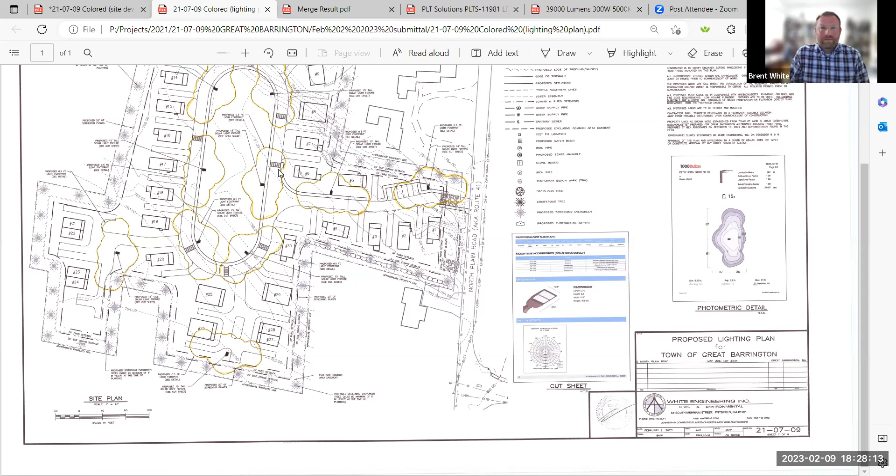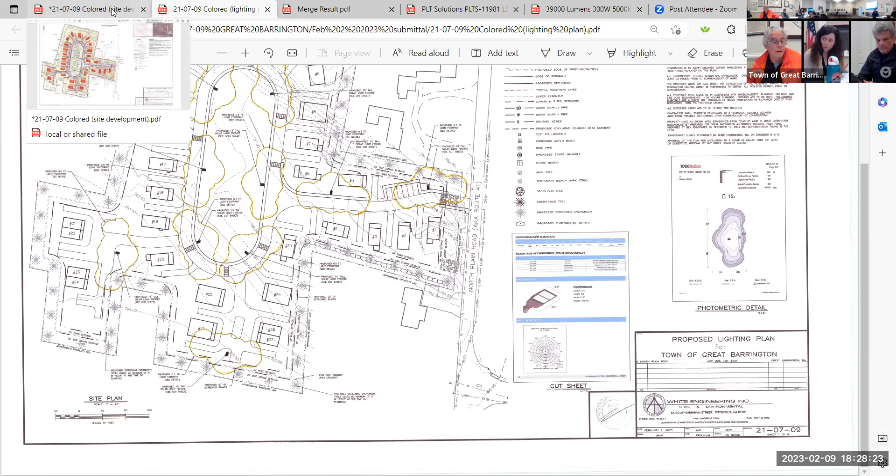Anything else, Jonathan? Not right now. Okay, we can come back, we'll just give everybody a shot though. Jonathan? First of all, I'm pleased that you went from 19 to 30. That's a start. What I don't think you've accomplished is a PURD.

Because this is basically a subdivision. And the thing about a PURD is it allows you to cluster the units and provide more open space. And what I'm seeing is probably 6.5 acres of lawn, and the rest is just whatever happens on the perimeter. So I don't think it qualifies as a PURD. Show me one cluster on here of housing. I don't see one cluster, which is the purpose, one of the stated purposes of a PURD.

Well, can I ask you just, in reading the language here, it says that the purpose of the planned unit residential development in 8.5.1 is to allow for greater variety, creativity, flexibility in development, provide harmonious and diverse housing choices with varied setback lines, dwelling types, and cluster-type site planning with provisions to control. I read that as allow, not require. How is this different than a subdivision? It looks very much like a subdivision.

Well, it's greater variety and density. It's got some 2-family units. We allow 2-family by right, we allow single family by right. I don't know if they could get this many units in a conventional subdivision, but realistically, given the infrastructure requirements... they could, I don't know, Jonathan. But that's not what they're proposing.

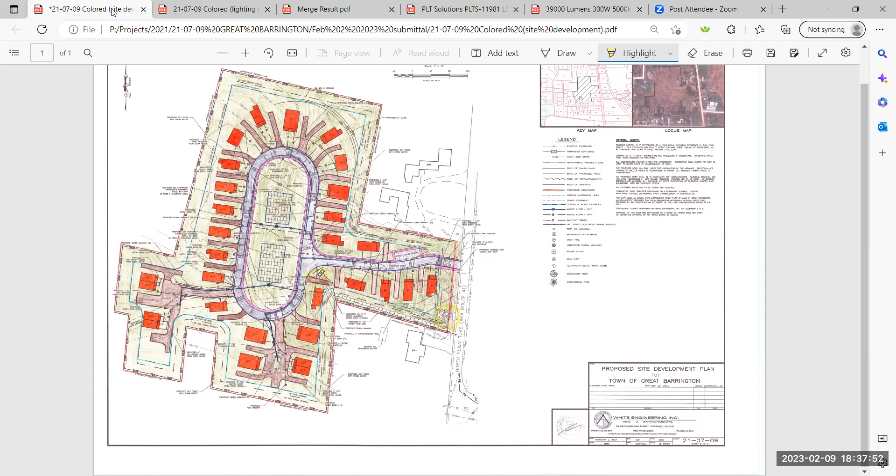The meetings we've had have expressed the desire for parking right next to a driveway, right next to their home, for bringing in groceries and that type of thing, and having a little yard, a little green space, something of their own. So maybe it would be helpful, Brent, if you could pick one house site and zoom in tighter to explain how a homeowner would engage with their house — where their driveway is in relation to their front door, where their front door is in relation to the street, and what space would be designated as their yard. Is it the space between the front of the house and the frontage road, or is it in the rear of the house? Aaron, maybe you have some insights as to how this has worked in other communities.

Is that blown up view more visible for you all? It's much bigger, that's helpful — still tiny, but better. Oh, thank you.

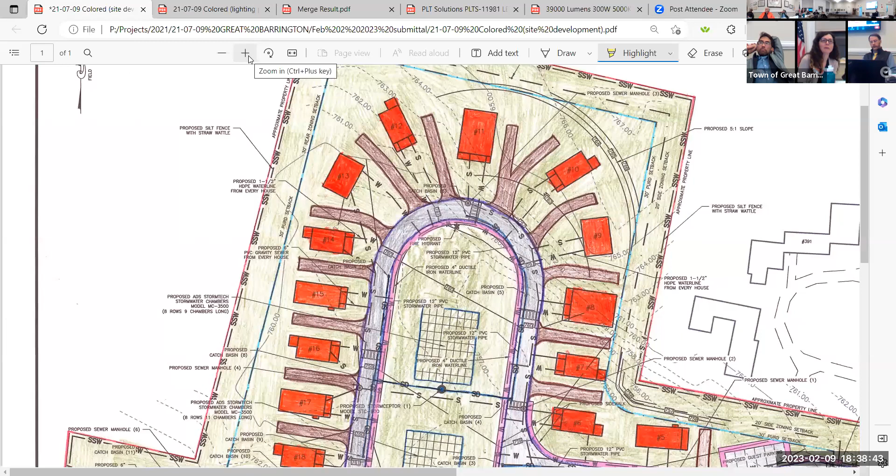So just in general, what's the average area around a house, in terms of square footage? In this case, let's use house number 11. Obviously we have a lawn area placed in front of it, and a porch shown on the front of this house. They'll also have their own green space behind that. Is 11 the footprint of one of the options that you provided to us in our packet? Yes, it is.

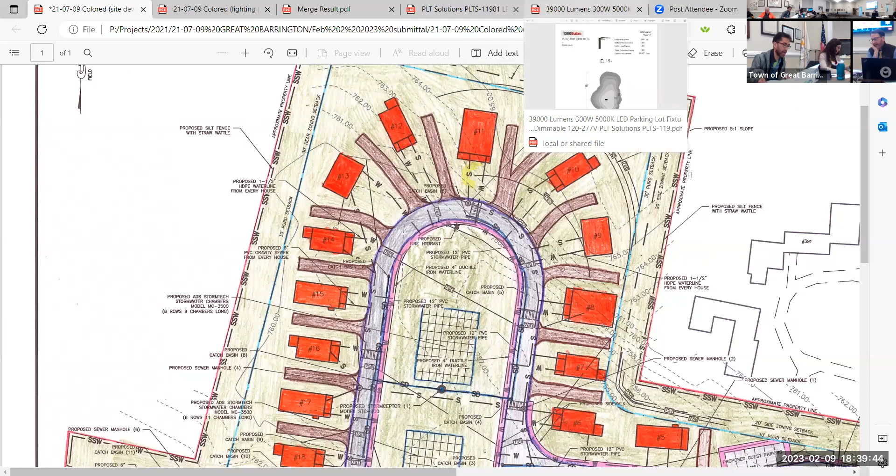Again, for help correlating, could you tell us which one in our packet it corresponds to? They do have cute names. That will take me a second, to be honest. I can tell which one's the duplex — how about that, I know it's not a duplex. There's one called La Petite. I think it's the Penyon. It's either Penyon or the Yorktown — I think it's the Penyon. We'll just open up the file with the different options. I don't remember the Penyon, I thought that was... I don't remember that.

This is Chris again. The exact dimensions of each owned parcel, versus the common land that would be held by the association or by the trust, is not determined yet. That'll be coordination with Habitat and Attorney Goodman to figure out exactly what the ownership footprint is. So the exact lot lines, condo lines aren't drawn yet.

Sure, of course. And I guess to that end, does an individual who might be interested in buying in this community get a choice? Or is it like unit 11 is the Patricia, and if you want a Patricia, you have to be at unit 11? Or could it be that if people only want the Patricia and the petite, that's all we end up with?

I think, through the habitat process — Aaron, I'm speaking as both a former board member here as well as a consultant to Habitat — through the family selection process and homeowner education, Habitat has the opportunity to learn more about each individual family and what their needs are. Sometimes we'll have a single parent with multiple children. We may have 3 generations in a home where we need a first floor bathroom, with grandparent, parent, and grandkids all living in the house. So having a variety in the number of bedrooms and style of homes is intended to give as much flexibility as we can.

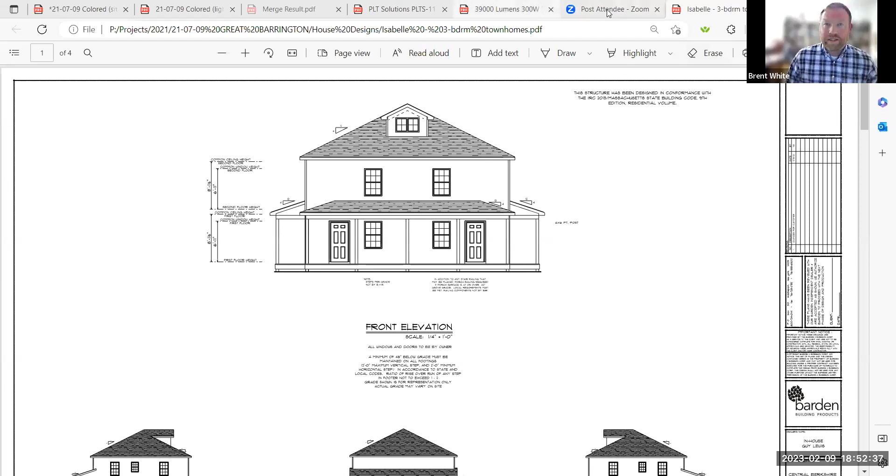Oh, Brent, you're muted. Let me see if I can pull up the lighting cut sheet here. I believe it has the ability to... yep, it does have the ability to be dimmed. I'm not sure if this has the ability for motion sensing. Given that this is going to be ultimately a town accepted road, I don't know—frankly I would defer to the fire chief and police chief in terms of whether they want those lights to have the ability to turn off or remain on. But our goal in selecting it was a solar powered, 15-foot tall, downward casting LED light. Our hope is that, based on the light footprint, it has enough to illuminate the roadway itself for safe passage at nighttime, but without creating light trespass onto abutting properties, and without shining a spotlight on the homes themselves. People will have their own floodlights or fixtures on the front of their house to get from their driveway to the front door or porch. The goal is, with lower level down-facing lighting, to safely illuminate the neighborhood without it looking like a commercial retailer's parking lot. I think there's probably some homeowners who would want those lights on all the time, as a pure public safety concern. I would just say, please no floodlights.

So Chris, in addition to the road and the sewer, will the town be the ones maintaining the lights? I don't know yet. Streetlights throughout town are not owned by the town—they're owned by National Grid and maintained by National Grid. These ones will probably be part of the local infrastructure, owned either by the town or the condominium association. National Grid itself offers very few lighting options, and certainly this nice lighting option is not offered. So I think this would be more owned and maintained locally.

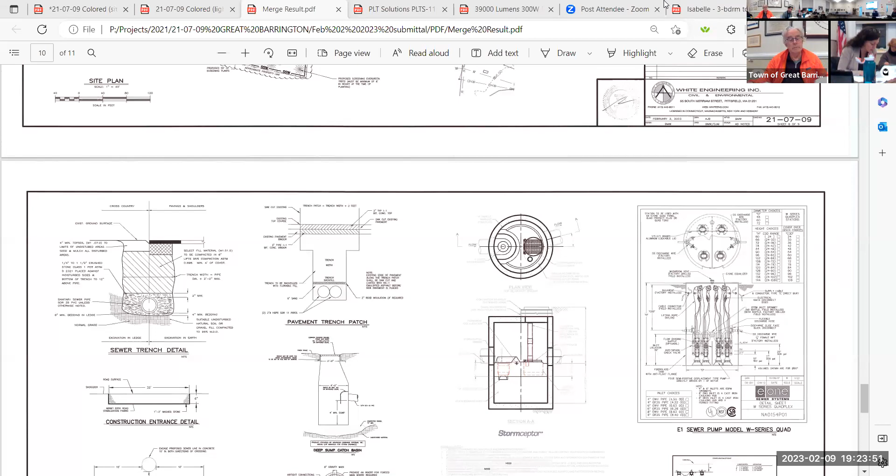So the open space - I think Jonathan's trying to get a handle on what is defined as the open space. You've got your common space listed as 34,000 square feet - 34,360 square feet in the circle. Is there open space elsewhere on site? Where is the open space? Where'd you find the calculation, Chris? It should be in the center of the circle - that's the primary defined open space. We have buffer area behind the houses.

But the primary contiguous open space currently is focused on the center of the road network here. I think the suggestion made with regards to reducing the setback of houses from the edge of the road towards the front of the house - if we were to maintain a 20-foot uniform setback here, that would provide a better opportunity for more contiguous open space behind the units themselves. We're happy to look at how that might function with the topography and the plantings.

I think, to a certain degree, that's interrelated to how, in terms of the homeowner association, the areas of responsibility are maintained. That open space will all be more clearly defined in terms of who has rights to what space, as well as who has responsibility for maintaining those spaces. That agreement will address both of those points, correct?

Jonathan, what is the requirement for open space? 2,500 square feet of usable open space per dwelling. That may include the common green in the circle, it may include the areas around each unit. It just says usable open space, doesn't say by whom or in common.

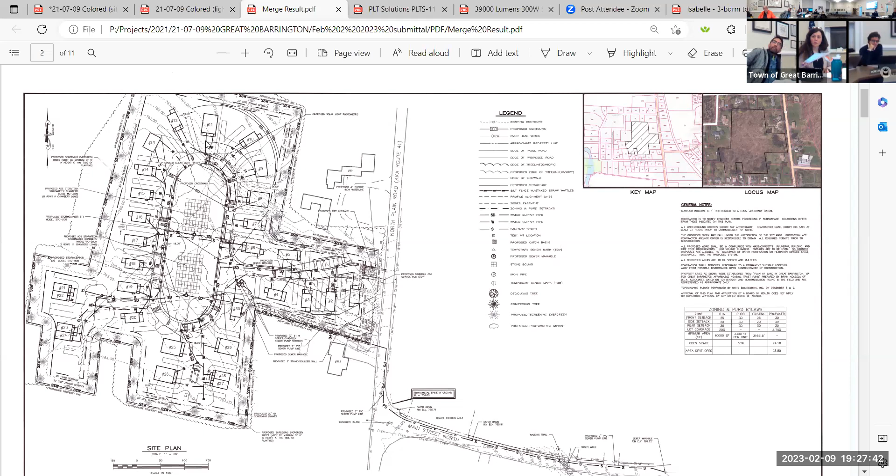Yeah, what is the visitor parking for? Visitors? Yeah.

Jonathan, we talked about each of the- but remember we did have. Well, look where, Carolyn, please. Look where the visitor parking is. But what if I want to take my kid to the bus stop, and that's a nice place to pull in. I believe Carolyn has an answer to the question.

Yeah, I do, so let me tell you everyone. We had a number of questions regarding parking at our meetings, and we actually asked people how often they had company. Our experience is that oftentimes if people have a lot of company, they'll end up parking in other people's areas. So part of the conversation we had was, if you purchase a home here, the expectation is you would have visitor parking so there's not blocking in and arguments about parking. It's about how do you live together and design it so that it's best to not have the problem to begin with. People really felt that having a parking area for visitors made sense to them, and we're hoping to have those covered for solar as well, so hopefully in the future we might be able to have some charging stations there.

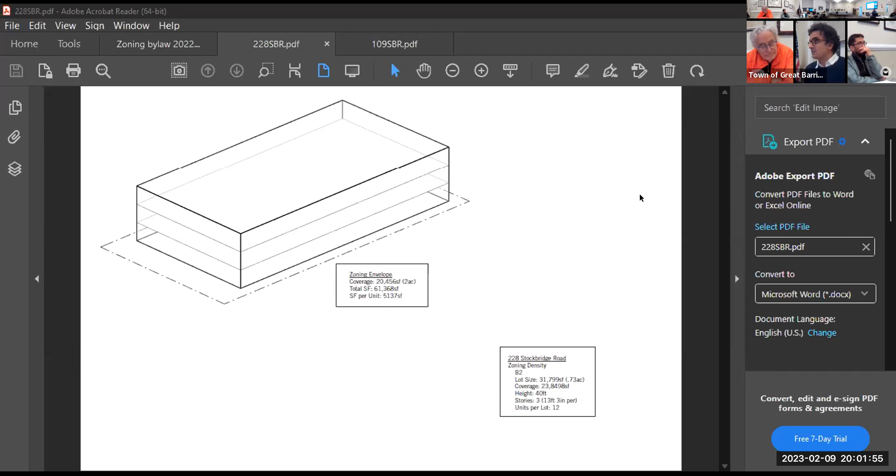Now, it doesn't have to be just housing. It could be a Walmart. It could be a gigantic new strip mall development. It could be whatever it is—humongous size there. And they can do 20,000 feet of it by right.

When it comes to housing, we don't let you do anything by right. The only thing you can build by right in this zone is a single family home or a 2-family home.

So your argument is because people can build a big ugly commercial development, we should allow them to build a big ugly residential development? No, that's not my argument at all. My argument is that what can be built there now is huge and ugly, and the town can't deny it. That's what I'm telling you—no matter what it is, it doesn't matter.

And that's a good thing? No, it's not a good thing. So how do we solve this? I don't think you're qualifying it. I think you guys are talking past each other—you make an argument, but I don't get it.

It's an equity issue, right? He's saying you can build a big ugly commercial, so why not be able to build a big ugly residential also? You could build a big ugly single family home. So why don't we fix the big ugly commercial part?

I think we want to do a corridor study. I think Chris was trying to give us an option, and we're having a discussion, right? So this is the option—Chris put an option on the table.

Since the last meeting, my suggestion was that I think we need to do more work on the corridor, because we were talking about some pretty dramatic changes. I think—Eileen misquoted me on that, but anyway—Chris was like, okay, what can we do to create more opportunity for housing, maybe as a patch in the short term for this town meeting? Okay, so it's like an intermediate step, if you will.

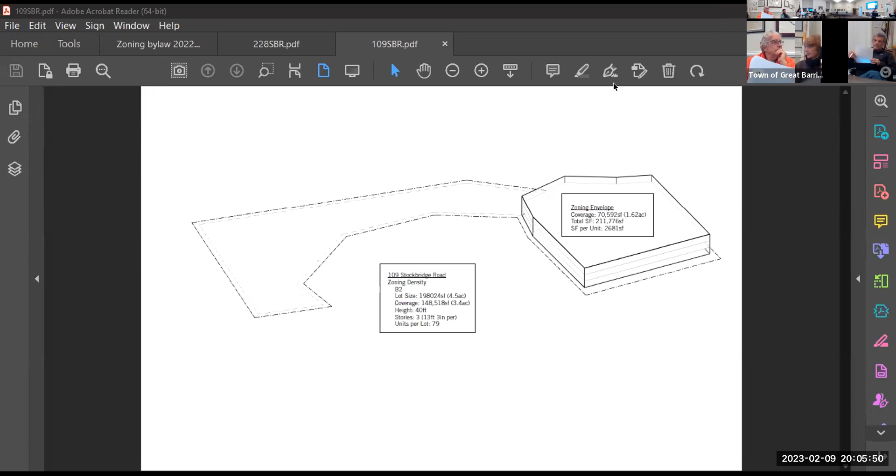If you look at the numbers, that envelope that I drew there does not even meet the lot coverage, and it basically takes up that entire space. The rest of this lot is basically undevelopable. So I just wanted to maximize the building envelope and see what would happen. And what I learned is that in this zone, you can build mega, humongous buildings.

But not residential? No, you can build a humongous residential building, at 2,500 square feet of lot area per unit. That's the one thing that I came out with.

You can see the building dimensions. Given our 2,500 square foot requirement per lot area per dwelling unit, we can fit 79 units on this lot. That would result, if we were to maximize this building envelope, in units that are 2,681 square feet each. That's all you can build. You can build them smaller if you wanted to, but if somebody wanted to maximize the lot, that's all you can build.

So I think we've been looking at incentivizing this Stockbridge Road corridor the wrong way, with bulk and height, although height could play a role, but with bulk and density, because the density is already there.

And so what we should maybe consider the incentive to be is, if for example, you provide 10% affordable housing, then your area per lot gets reduced to 1,500 or 1,000 per unit.

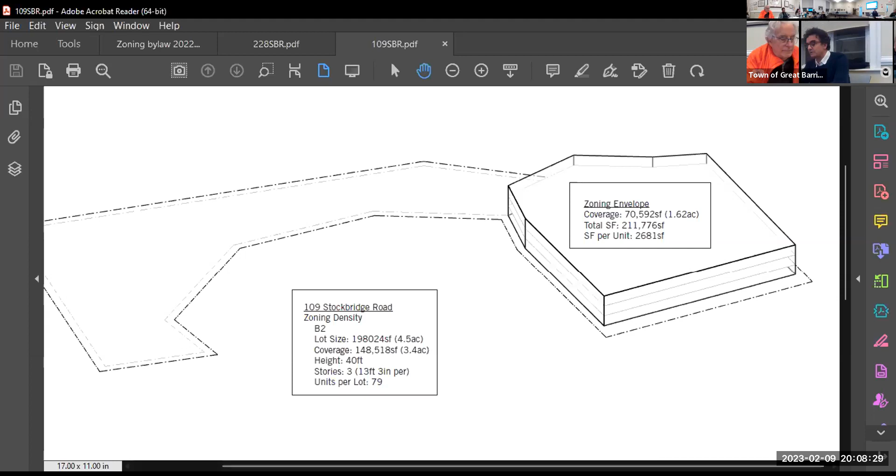I don't know why it's in there, because we've talked about it before. We have all these other safeguards. Because look, if you go to the next one, to the Goodwill site, you can only fit 12 units. So look at the size of the unit - it also means on a 5,000 square foot lot, you can only build a 2-family.

Couldn't build a 3-family. Let me get back to the language here, because what this reads is an absolute by-right for multi-unit family housing, not conditional on affordable housing.

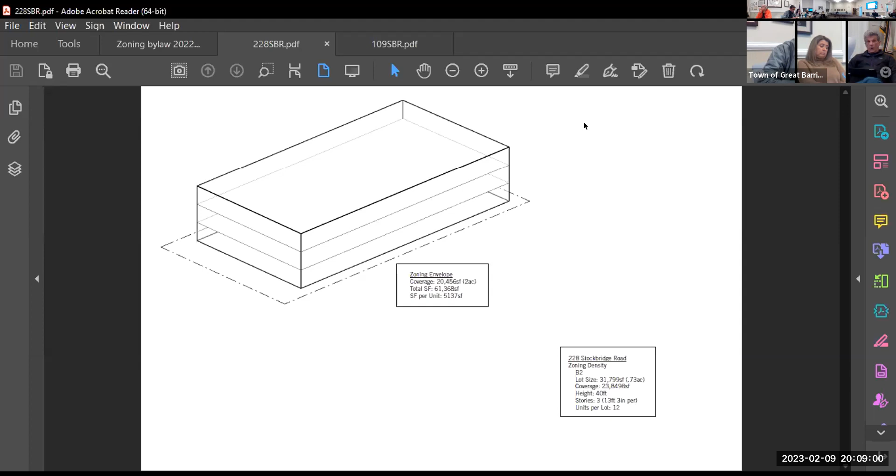Look at him, he wrote it. So are you guys - but this is our board - proposing that multi-unit dwellings of 9 or more be special permit unless there's an affordable housing component?

Well, that's what section 8.3 affordable housing footnote X says: in any development containing 9 or more units, at least 10% shall be affordable. Do you want to share that footnote? So there's no option of not having affordable housing.

That's if you want to do it by right. If you opt out of the special permit, that's not the way. But that's what it should say. I don't know, I don't have it in front of me, so.

Can we do that? The text that I sent to you would allow the by-right development of 9 or more units, but that development would have to include 10%. So would there be a provision for a special permit then if they didn't have 10% affordable?

No, that's already in there. There would not be - it's already there. So there's the provision. You would not be able to build without... no, of course you would, without a special permit - sorry, I didn't mean, you're right, because it's already in the bylaw. You would not, if this change were to go through - let me just put it on the screen.

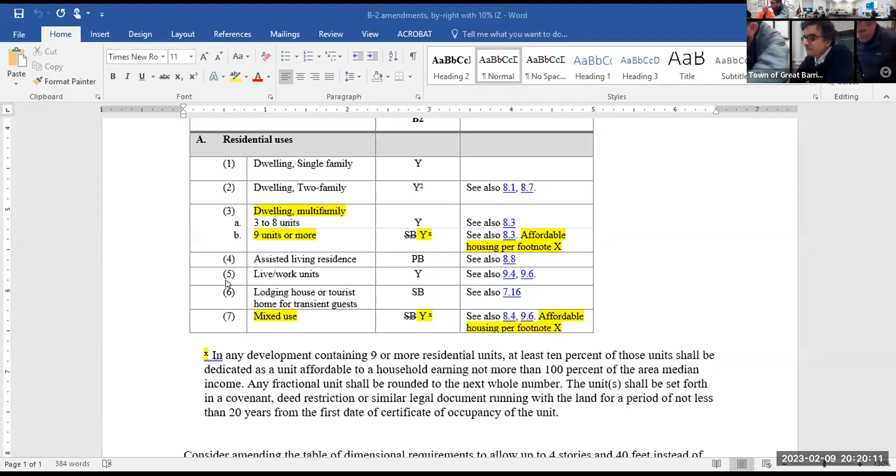No. Are you sending something different to Jonathan? That's it, there it is.

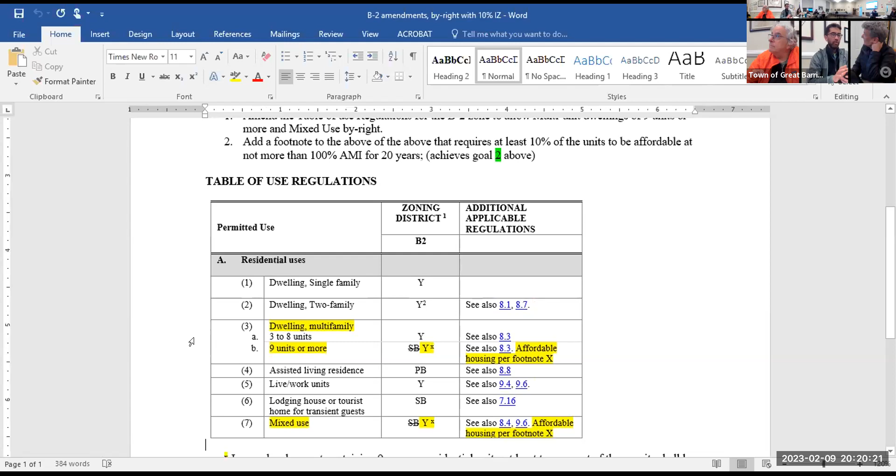So that's adequate - it's everything that's in your... what about the change in height? Change in height, no. It's just the change in story, not height. That we haven't really actually discussed. Oh, consider amending the table.

Yeah, that's a different issue, but keep it in the back of your mind because if they bring it up to build a childcare center, that'll be an incentive. But yeah, let's just stay with what's ahead.

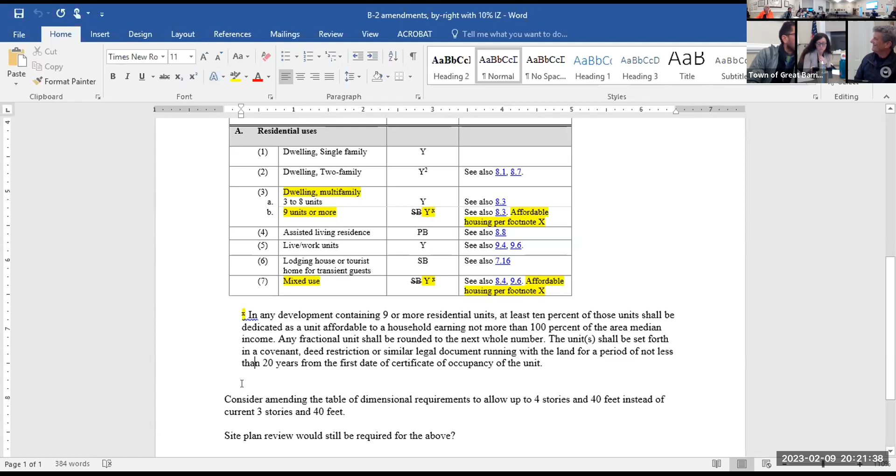Okay, so we have a motion and a second. So what are we doing about the 4 stories, 3 stories? The thing about 4 stories is you can't really fit 4 stories on 40 feet, so it would have to be 4 stories, 50 feet. But again, this can change at the public hearing, and before we recommend it to town meeting we can go through it.

What can we add, eliminating the 2,500 square foot? I think that's a different zoning thing - it's not just for this section, that would be changing the multifamily regs. So I think we should do it, but that would be a separate action.

So do we want the 4-story in there? Just leave it in there for now. This is a procedural action, let's just get moving here.

So what is the select board gonna do with that sentence that says 'consider'? The select board is simply going to refer it right back to you. Okay, so we're only doing this - it'll be administrative.

Do we have the question mark on site plan review though? We're gonna vote on it. I just want to make sure that we're voting. I'll delete the question mark - the site plan review is already in the bylaw, that's why I was thinking the question mark should go.

So we are voting to refer this suggested change to the select board so that they can refer it back to us instead of to public hearing, and we will have time to make some modifications. The sentence says 'to consider amending,' which means we could then consider it because the select board sent it back, and that falls within that scope.

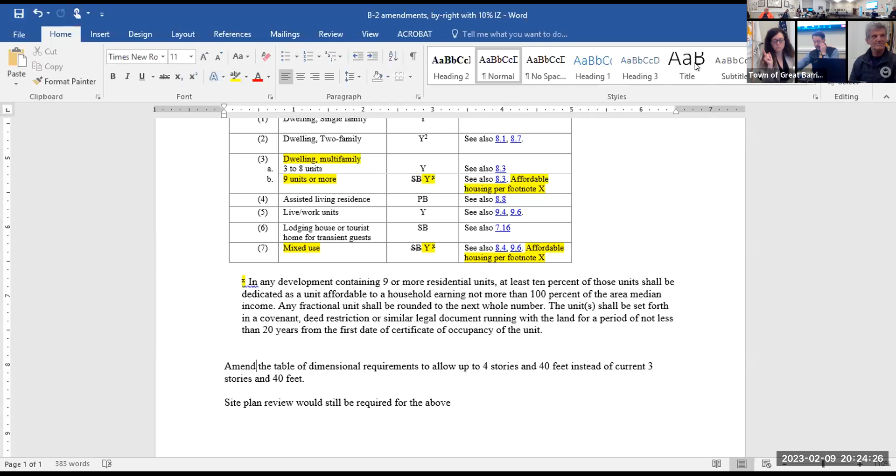All right, so we have a motion and a second - we considered it, and we don't have any further discussion. Hearing none: Malcolm? Aye. Jonathan? Aye. Jeremy? Aye. Pedro? Brandee? Aye.

Okay, all right, so we're taking these one at a time. Thank you. Are we gonna add one to these? Hold on, what do you mean - the 2,500? Possibly, let's define it first - 2, 3, and 4. Chris made a suggestion.

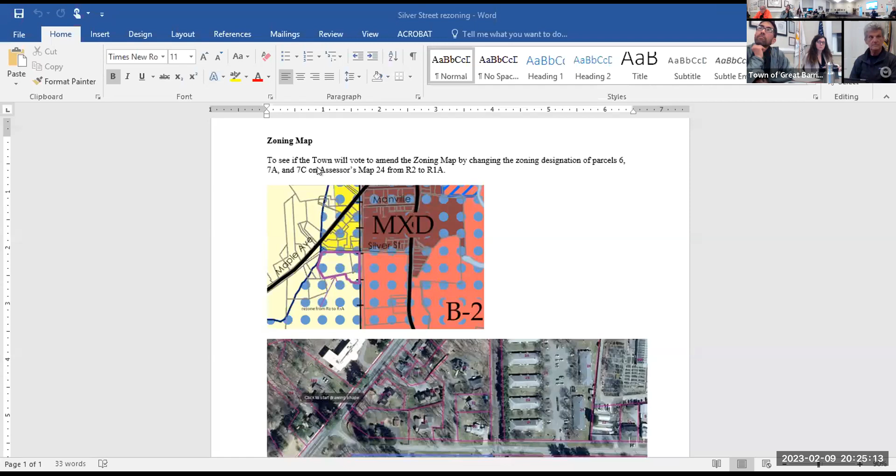I think we all got an email communication regarding the Silver Street parcel, south side of Silver Street. It's a couple of big parcels currently for sale. Across the street is R1A, but they are R2. Given that they have infrastructure and are on the roadway, and it's a big level piece of property, is everybody familiar with that lot, with the area that I sent in the email?

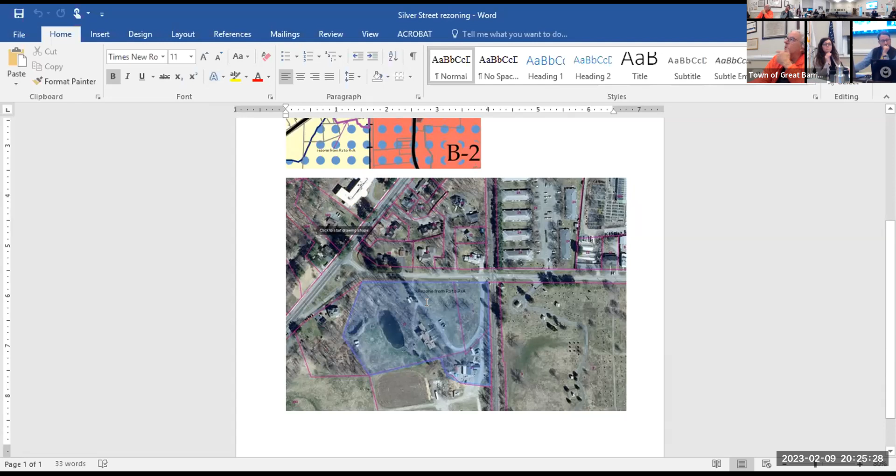Yeah, I'm a little confused because I'd originally proposed this for the SGOD, and Berkshire Regional Planning said no, we couldn't use it for the SGOD. Why is that? Because of the way the smart growth regulations are written in chapter 40R of the general law, only certain types of land are eligible. That would include commercial type land or areas that could be considered intensely developed for things other than multifamily zoning. Because this was an R2 zone, it just didn't meet the threshold under those regs.

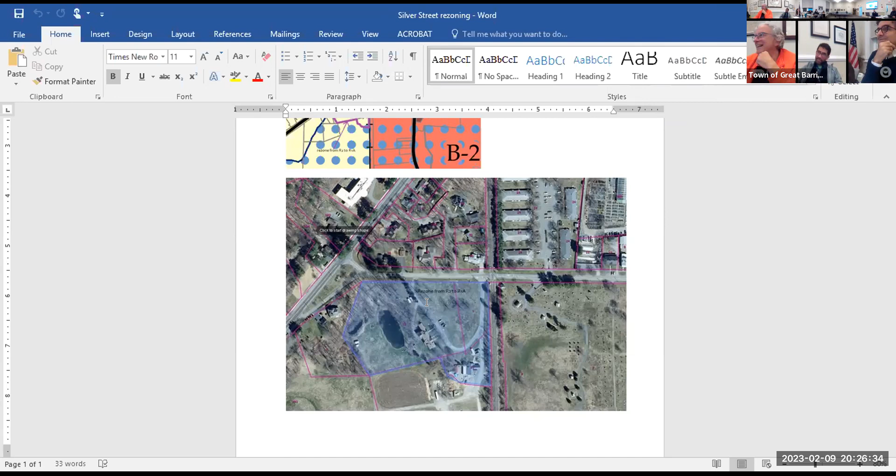So now it couldn't be an SGOD, but a straight zoning map change is up to us as a town. But if we did do that, could it then be an SGOD? Possibly. Because it is two parcels, right? There's three parcels. Oh, those three parcels. Because that cemetery is pretty densely developed - there are a lot of people, densely occupied. It's not as densely - there's a lot of open space in there, but anyway.

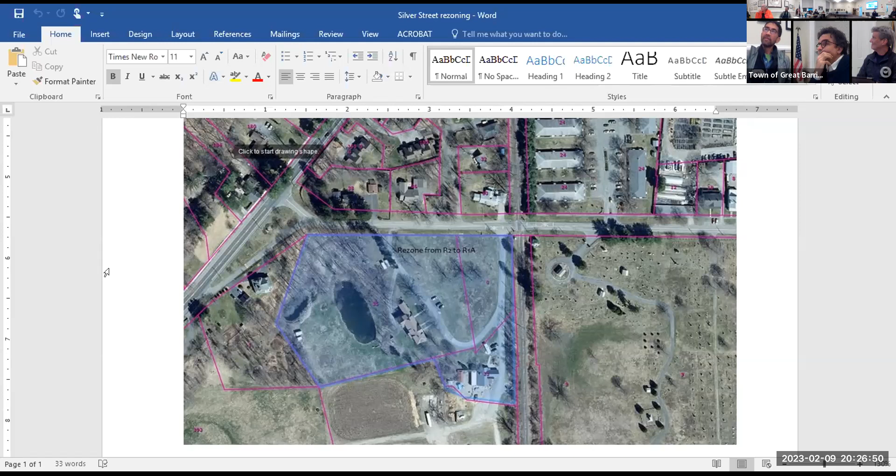I have a question. Well, I heard the cemetery might be looking for more space. Hold on, I realize it's on the other side of the tracks, but why can't we consider MXD here? The MXD zone is sort of catty corner.

Can everybody see the cursor? It's where the Beechwood Tree Common is. It's not across the street, right? It's kitty corner, it's right there, just on the other side of the tracks.

So you think that would be spot zoning? No, but I think it makes more sense as part of the R1A, which is immediately across the street. Yeah, but the R1 is the hill. That doesn't feel like the hill. And all it does is reduce the lot size requirement. Yeah, and we've already got that huge house there - it's a multifamily house already, right?

Yeah, MXD allows business and retail. Right now this is purely residential. Yeah, I think we wanted to stay residential. So this is residential. You know, I mean, there's a business right there on the other side.

There's that, what's her name? Right on the other side, the spa, yeah. There's business there that was a home occupation until they moved. That was - I think it's a little specious to say there's no business there. There's no business on that side of the tracks, but on the other side of the tracks there are home occupations.

Yeah, I don't know. And this commercial used to be a home occupation, right? No, I think this wasn't part of the farm. R1A is an easy step to take. I think MXD is a more complicated step.

So the R1A, I'm interested - to me the R1A doesn't excite me, it doesn't really do anything. Okay. But would you rather it be an R2? I don't really care if it's R2 or R1A.

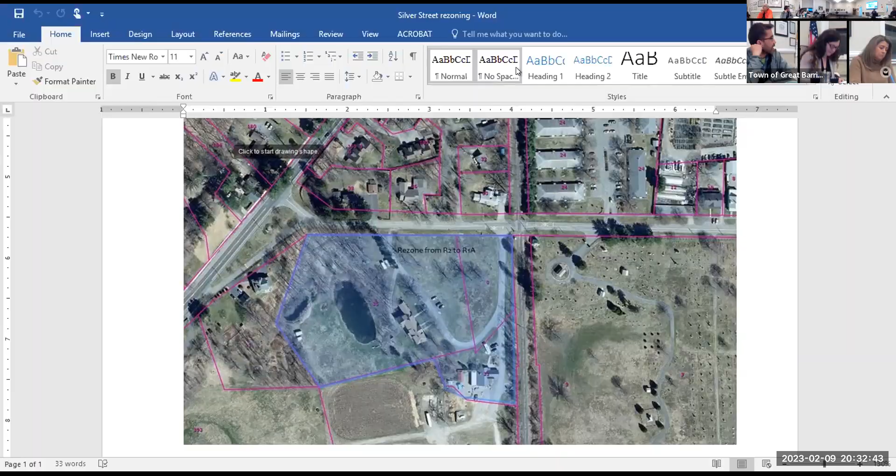This should be an easy one, but it isn't. Well, let's send it on, if we want to debate it further we're gonna debate it when it comes back. I thought this would be uncontroversial. I think you have a motion, I have a motion and a second, no discussion. Malcolm votes aye, Jonathan aye, Jeremy, Pedro aye, Brandee aye. They were all such excited ayes. I was waiting for an abstain or no.

Thanks. Items 3 and 4 kind of go together and pertain to the Stockbridge Road corridor. I still feel like that needs more work, and we've got an alternative approach that works for the time being. Yeah, no, this is what I put.

I'd say table 3 and 4 for now, and then do we want to discuss a possible fifth item for 8.3.3.1 multifamily? Thank you, it's on page 53. I'm looking at the online version, 8.3.1 multifamily dwelling. 8.3.3.1, right? Yes, 3.3.1, two 3s and a 1.

In a multifamily development, more than one principal building may be permitted on a lot, provided that there shall be at least 2,500 square feet of lot area for each dwelling unit. The SPGA by special permit may allow the lot area per unit to be less than 2,500.

So do we want to strike all of item 1, or just the special permit requirement? No, I think we should strike all. Why are we covering this? Because we have dimensional requirements, coverage requirements, lot coverage, lot setbacks, and parking. So we could eliminate all of item 1. I think so, I propose that.